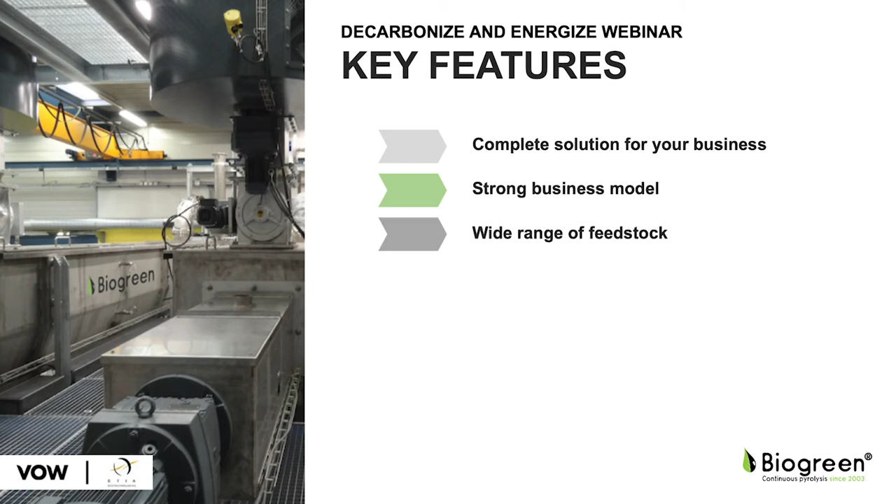And when we are working on the projects, we go hand in hand with the client. We assist to develop a profitable business plan and a model of operation. Our system is a very versatile solution. It is suitable to treat a wide range of feedstocks. And thanks to the technology that we use, we can work with very challenging products. And we also do not hesitate to treat unusual and non-standard residues.

We are basing our technology on a system that is powered by electricity. This allows us to not only ideally control the system operating conditions, but we are also a fossil-free solution where we do not need to use any conventional source of energy to heat up the pyrolysis itself.

This electricity allows us to have an exceptional precision of treatment. Thanks to that, we are regulating the temperature very accurately with a precision of a few degrees Celsius. And thanks to that, we can also ensure a great quality and repeatability of our products.

This allows us to adjust the operating conditions, and depending on the desired outcome, we can fine-tune the process according to your business model. And last but not least, BioGreen is a solution which has an operating track record of over 15 years. We made our first pyrolysis plant in 2003, and we have over 40 implementations worldwide. This allows us to accumulate experience and offer proven solutions with an industrial track record.

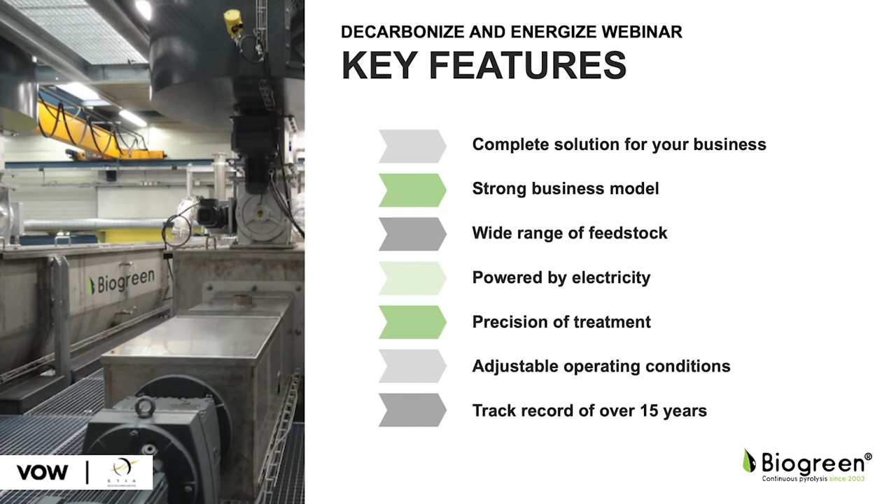So all this together makes BioGreen an incredibly versatile solution that can be applied in many industries and in many places around the world. So let's take a brief look at the technical side. BioGreen is a solution that is based on Spirajoule, which is our patented technology for electrical heating.

Spirajoule is basically a hollow shaft screw conveyor, which heats up thanks to electricity. The low voltage current is connected to the screw, and it flows through the screw, creating a resistance effect. And this basically allows us to heat up the materials to the desired temperature. At the same time, Spirajoule is also transporting the material along the reactor. So thanks to that, we can control very precisely the residence time and how long the material spends in the thermal treatment.

So all in all, Spirajoule is a very simple but very efficient solution that can handle many types of feedstocks, such as crops, wood, husk, shells, and convert this feedstock into valuable products and energy in precisely controlled conditions.

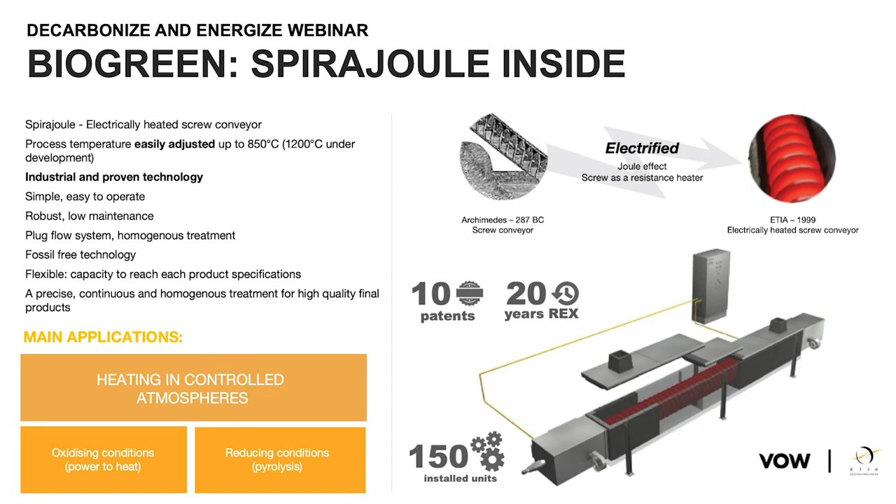Spirajoule is also a very well-established solution, which has a lot of implementations all over the world. During the company's activity, we have delivered more than 150 machines in 40 countries worldwide. Among that, we have over 40 pyrolysis plants, which are operating on different types of biomass and different types of residues.

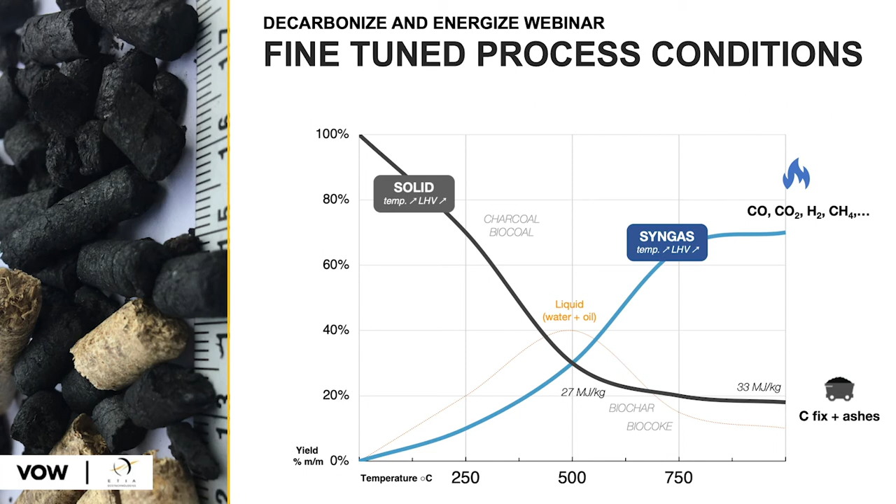It is also worth saying that since every feedstock is different and we work with so much variety of products, we need to check what is the best process for every individual customer. So we operate several testing plants all over the world, and these testing plants are running over 100 tests per year, and they're providing a proof of concept for our clients. We find this is a very important element of the strategy because we can verify the performance of the process on your feedstock, analyze the products, and create a full mass and energy balance.

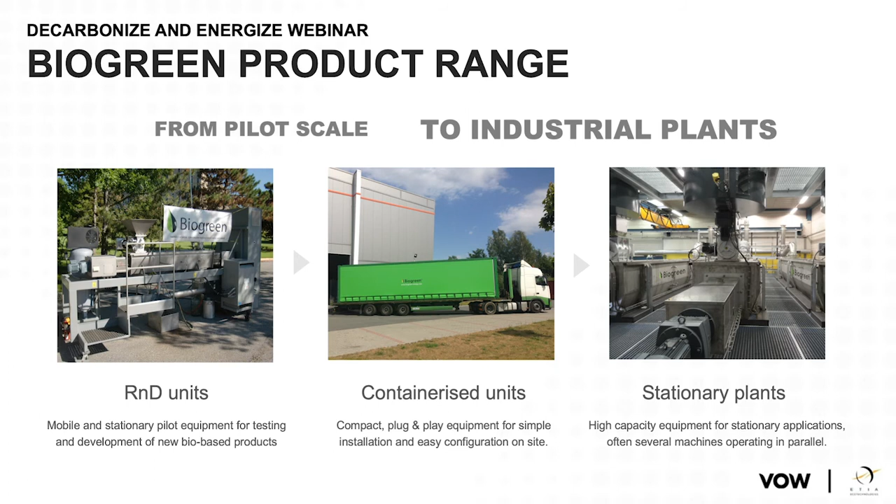So why do we speak about decarbonization? Let's go through a first example of how the BioGreen process can actually be a carbon negative solution. First of all, when we look at the whole operation, our process is suitable to be installed right at the place it is needed, where the biomass or the residues are generated. So thanks to that, we are very often avoiding the carbon emissions related to the transport of biomass over long distances.

But this is just a start, because pyrolysis allows us to convert the biomass into biocommodities, such as biochar, but also concentrate the carbon, which in the case of biochar is a fantastic way to reduce the carbon footprint. By using biochar in agronomic applications, we are actually locking the carbon in the soil, while at the same time we are producing green energy, which can be used locally to, for example, replace natural gas on site. So in this way, again, we are offsetting the carbon emissions.

And to guide you through an example, let's take a look at these numbers. On average, one Biogreen system can treat 7,500 tons per year of biomass. This can produce over 22,000 megawatt hours of steam each year, which is helping to offset the natural gas consumption. This is equivalent to around 4,000 tons per year of CO2 emission saving.

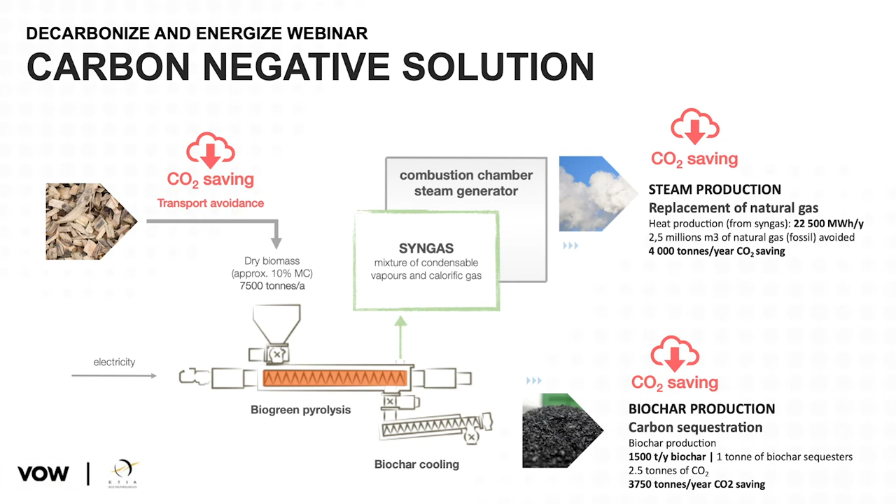And when we speak about the biochar that we are producing, we say that this is a green commodity or a biocommodity. At the same time, it's a carbon negative material, which we produce in the process of pyrolysis. Most frequently, biochar is a product that is used to enrich the soil. In France, for example, we have established a first certified production of biochar, which is authorized by the French government.

And this doesn't only help in CO2 saving, but it also creates a very important added value for agronomy, because biochar is a very porous material, and thanks to this porosity, we can maintain the water in the soil longer and make the water available for the growing plants. So biochar is not only a measure for carbon capture, but it's also a functional material, and it creates very big value as a green commodity that can be sold on the market.

And let's speak about examples. This year we have launched a new project located in Sweden for a local waste management company called NSR. NSR is a company that is very thoughtful about the way they manage their waste. They see that there is great value for the environment, but also for the community, from the residues that they are collecting.

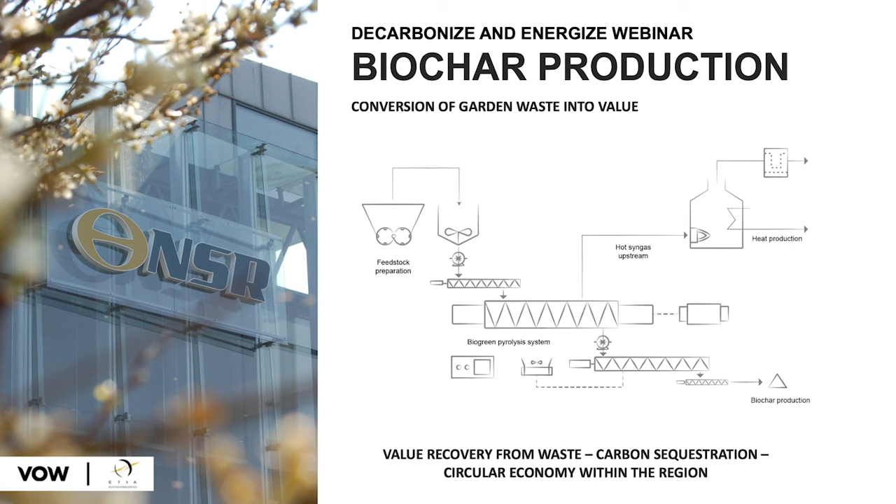But biochar is not the only way to go. The other way to meet the challenge of decarbonizing and energizing is actually to produce a solid product that can replace, for example, fossil coal. And a good example of that is our project to produce a biocoke for the metallurgic industry, which, as perhaps you know, is now under very big scrutiny due to their carbon emissions.

On average, when we look at the steel industry, 1 ton of crude steel generates around 1.6 tons of CO2 emissions, the majority of which comes from using fossil coal. So that means between half a ton to 1 ton of coal is used nowadays to produce 1 ton of steel. And this, together with the fact that biomass is so widely available, creates a great opportunity, because we can produce a green product that will create an alternative to this fossil coal.

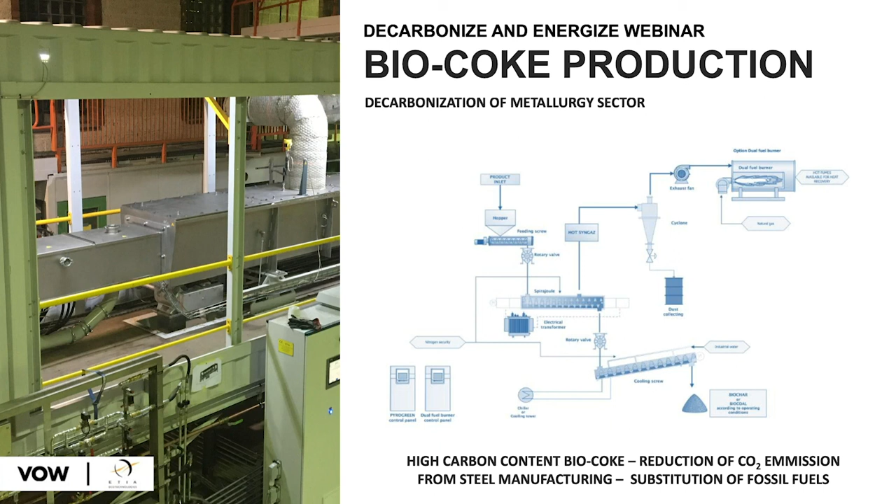And this is where Biogreen steps in. We have already delivered 3 plants that are working to convert biomass residues into biogenic coke. This biogenic coke in its carbon content and properties resembles fossil coal, but it is an emission neutral product. So that helps metallurgy to reduce and neutralize their CO2 emissions by the equivalent of around 1.6 tons of CO2 per each ton of steel produced.

But of course, that is not everything. At ETIA, we are working on many applications which are helping to reduce industry's carbon footprint. We are focusing on creating added value and being relevant not only for biomass residues, but we are also working with waste. We are also working on converting RDF, SRF, plastic waste, and end-of-life tires into valuable commodities and energy. So these are the topics that we'll be talking more about in the next webinars.